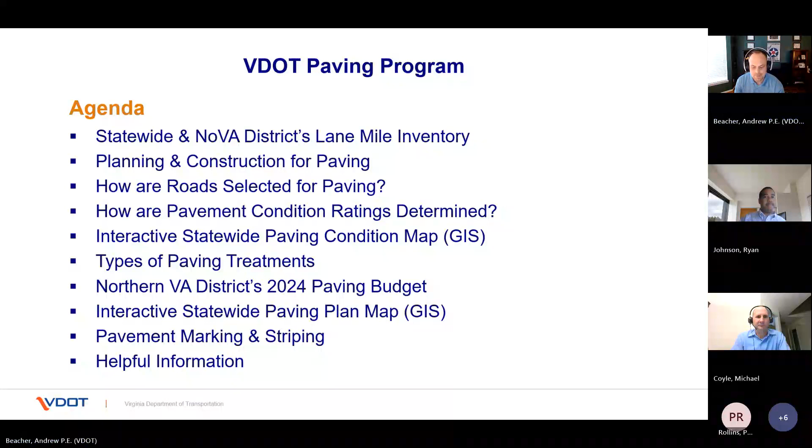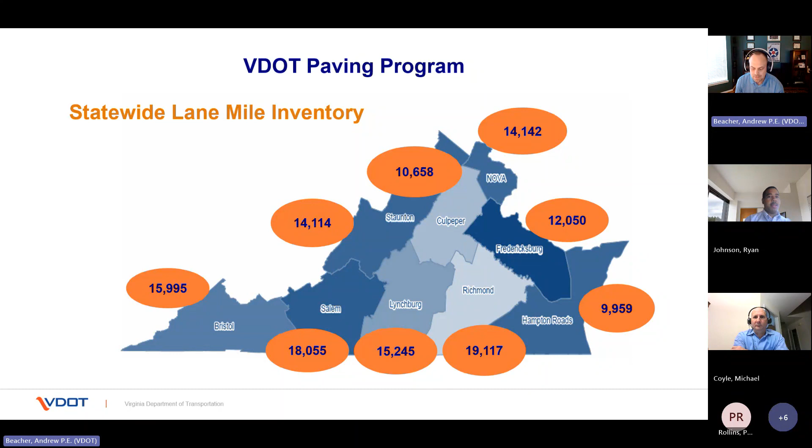All right, jumping right in. As you may know, when we talk about our roadway inventory, we talk about it primarily in terms of lane miles. Overall, you can see how Northern Virginia compares to districts around the state. We're somewhere in the middle in terms of lane miles, but packed into a much smaller geographic area. Breaking those numbers down further, of those 14,000 lane miles, over half are in Fairfax County, about a quarter in Loudoun, a little less than a quarter in Prince William, and Arlington County has only about 2%, keeping in mind Arlington maintains their own secondary roadways.

In terms of the paving program's planning and construction, the construction period occurs during the warmer months, April through about October or November. But the planning that goes into that happens year-round. Starting in the spring, data is gathered for the next calendar year. Later in summer and fall, that data is reviewed, schedules and contracts are prepared and advertised for bids, and prior year contracts are closed out. Finally, in the wintertime, bids are received and evaluated, contracts are executed, and notice to proceed is given to contractors for the next year. So it's a year-long process, and we're always busy with various aspects of the program.

A question we often get asked is how roads are selected for paving. Primarily, we look at the pavement conditions of the roadway. We have very specific measurements that we look at from the field, and I'll talk more about those in a minute. But we also consider other information such as the roadway traffic volumes.

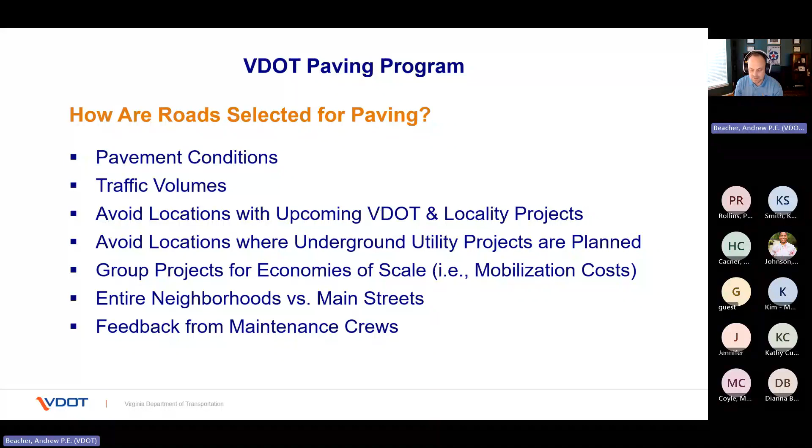So here's what I was talking about a moment ago as far as the data collection. There is a specific type of vehicle that we use for that. It's called an Automatic Road Analyzer, or ARAN.

There's a number of different types of data that we can collect with that: pavement distress, roughness, texture, and rutting. And we do that through various means, including digital scanning, measurements, video and imagery, and also GPS. So there is a lot that goes into that data collection program.

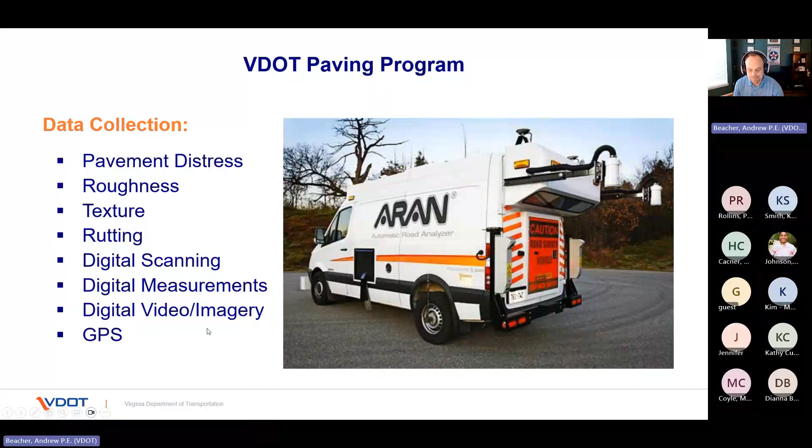Now, as far as the frequency, for the interstate, primary, and high volume secondary roads - those secondary roads with average annual daily traffic above 3,500 vehicles per day - we collect that data annually. For the lower volume secondary roads, it's about 20% annually, or 100% every 5 years.

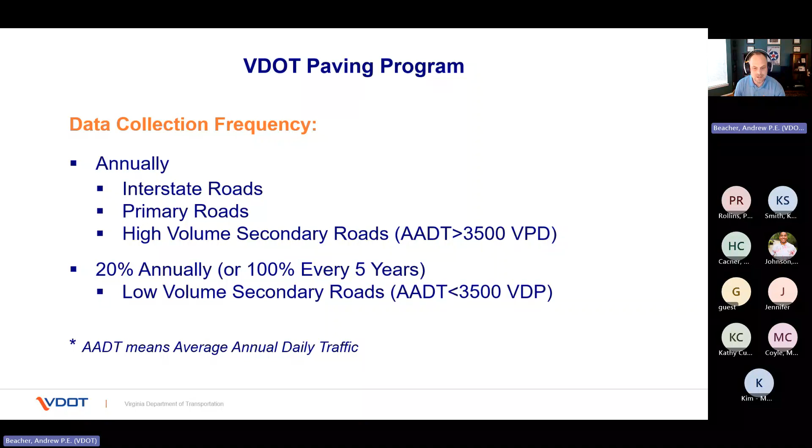Just one note on that: with the sheer number of secondary roads, that's why it takes us longer to make a complete circuit of all the secondary roads that we have in our system.

Now, the pavement ratings themselves are based on what is called the Critical Condition Index, or CCI, and you can see our scale on the left-hand side of the slide. Anything below 60 is considered poor or very poor. Above 60 is anywhere from fair to excellent. There's a couple images on the side to help give you an idea of what certain ratings feel like.

Obviously, our goal is to try and keep all of the roads in fair to excellent condition, and I'll talk a little bit more about how we grade ourselves in terms of how we're keeping up with the ratings on the next slide.

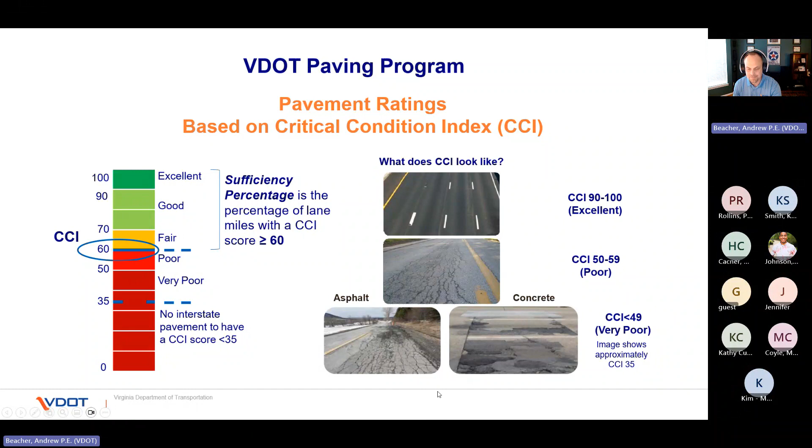So as an agency, VDOT has set targets for each of its districts with respect to pavement sufficiency, and it's dependent on the roadway classification. So we have different targets for the different types of roads.

For interstate roads, our target is 82%, meaning that 82% of all the interstate roads, we want to have a CCI of 60 or above. Then we look at the primary roads with high volume, over 3,500 vehicles per day, also a target of 82%. The lower volume primaries is a target of 75%. High volume secondaries is 82% again, and then the low volume secondaries is 60%.

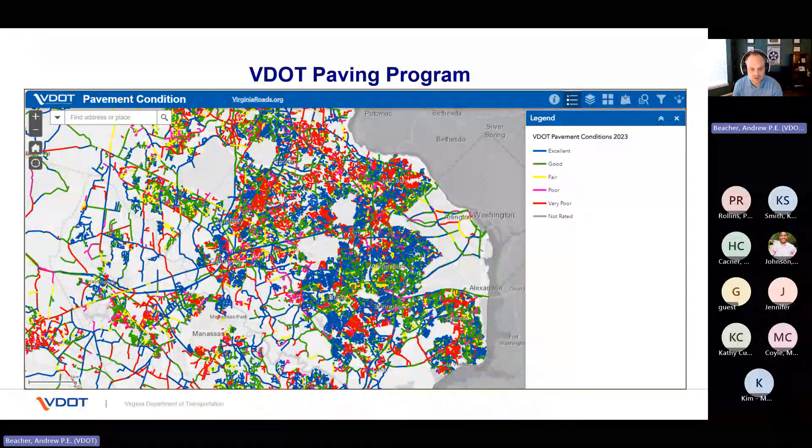But again, we're striving to meet those targets every year within our limited budgets.

In terms of the types of pavement treatments we implement, in some cases our staff may determine that a preventative treatment is in order. Rather than do a full milling and overlay process, they might just do something like what we call a slurry seal, which is preventative in nature. We're trying to extend the life of the pavement through this application until we can do a full mill and overlay in future years.

Next we have the actual milling and overlay I was referencing. There's two types: corrective or restorative maintenance. The difference is in one, you're only milling about 2 inches and then overlaying that back. With restorative maintenance, we're going down up to 4 inches and then overlaying back a surface and intermediate mix asphalt.

Finally, our less common treatment used in more extreme situations is full depth reclamation, where we actually excavate all the existing pavement, add back about 6 to 8 inches of pavement stabilization and 2 to 4 inches of intermediate and surface mix asphalt. That is less common, and usually we don't like our roads to get into that situation, but it does happen occasionally, and that is the treatment we would employ to correct it.

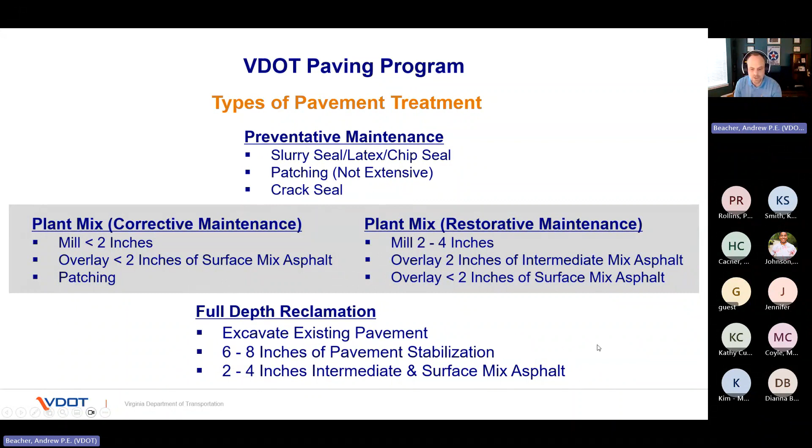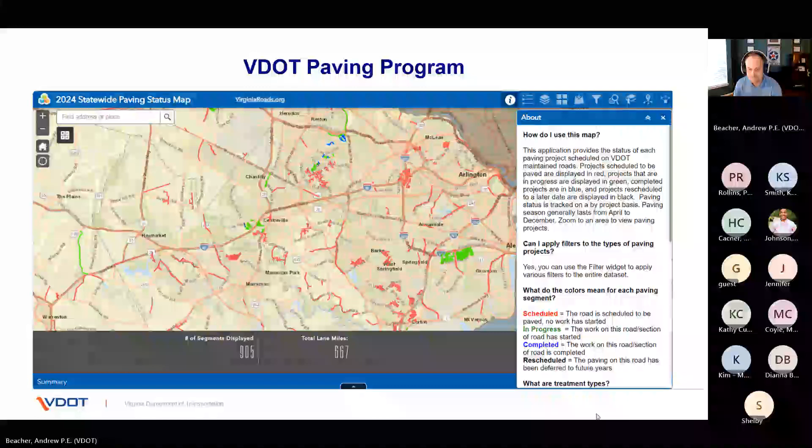As far as pavement marking and striping, the way our contracts are set up, we typically replace in kind the existing striping almost immediately after we get the repaving done. But occasionally we're able to make some minor adjustments during repaving. More elaborate changes, such as for bike lanes, new crosswalks, road diets, that kind of thing, require significant prior planning and coordination. It's something we work hand in hand with Fairfax County on if there's interest in making changes like that.

If there's a situation where we're looking to do some significant changes, in most cases we will defer that repaving to a future paving cycle so there's adequate time to do the appropriate planning and analyses, making sure everyone is comfortable and on board with the proposed changes. Of course, the county is going to speak a little bit later about specifics related to those types of initiatives that might be occurring in your community.

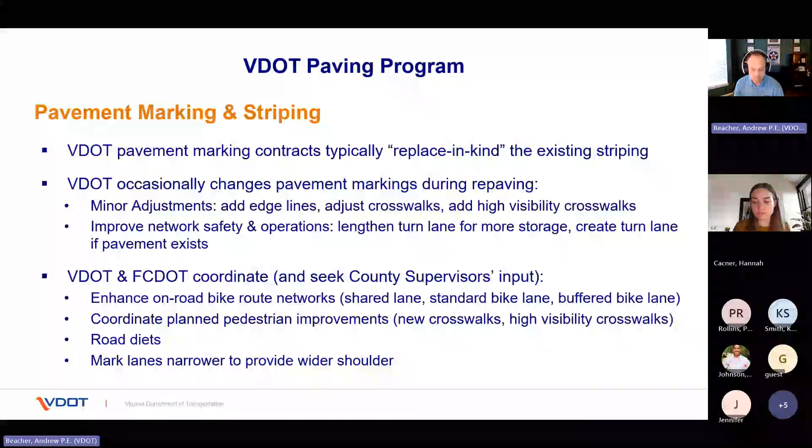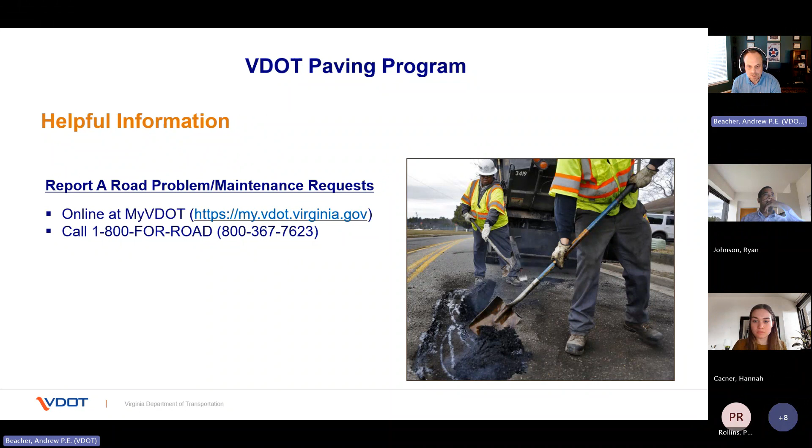Lastly, my concluding slide shows how the public can reach out to VDOT if you're experiencing an issue with a road or a maintenance request. You can always go to the My VDOT website at my.vdot.virginia.gov, or call us at 1-800-FOR-ROAD, that's 1-800-367-7623. We certainly encourage you to take advantage of those resources.

So at this point in the presentation, I'll move on to FCDOT's proposed striping modifications as part of the 2024 repaving program.

I'll start with a little background on Fairfax County's role in the repaving program. Every year we collaborate with VDOT to provide new striping improvements on our roadways, typically in the form of new crosswalks and bike lanes. We start off by reviewing VDOT's draft repaving list and identifying roadways that could be good candidates for new crosswalks or bike lanes. We're limited to roadway segments that VDOT is already repaving, so any proposed crosswalks or bike lanes need to fall within that area.

Also worth noting, the scope of this project on FCDOT's end does not extend beyond adding striping to the roadway, so improvements like protected bike lanes or sidewalks are not something we're able to add through this project.

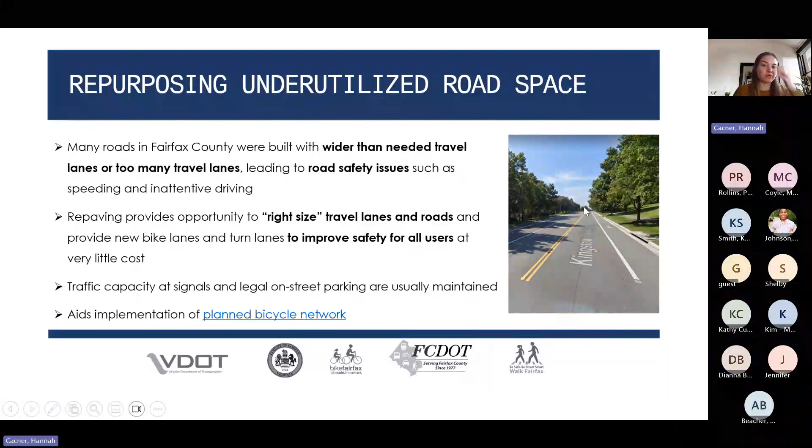A major reason we do this is to repurpose underutilized road space. Many of our roads in Fairfax County were built with much wider travel lanes than necessary, or with too many travel lanes, which can lead to safety issues like speeding or inattentive driving. The repaving program allows us to bring lane sizes down to a more appropriate size by adding improvements like bike lanes, which can make the road appear narrower and improve safety for all users at relatively little cost. Traffic capacity at signals is typically maintained, and we try to maintain legal on-street parking where space allows when adding bike lanes. Adding bike lanes through the repaving program also aids in implementation of our planned bicycle network.

As you can see from this photo, you get a really nice traffic calming effect through adding those bike lanes, as we did here on Annandale Road through the repaving program. With that additional striping, drivers get a visual impression that the width of the roadway has been reduced, which has been shown to slow vehicle speeds.

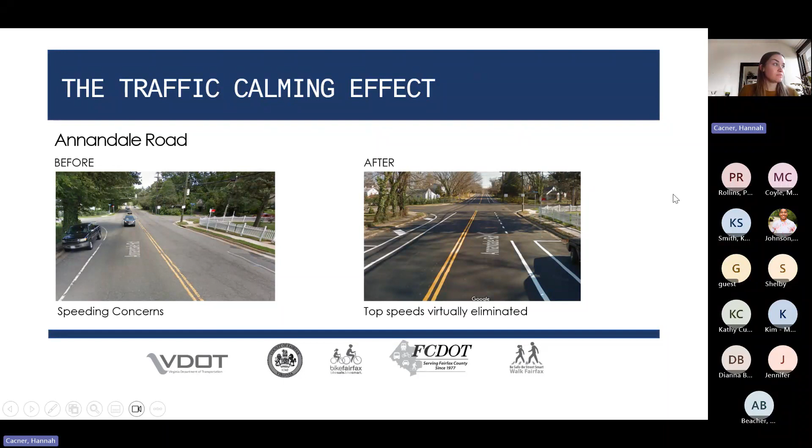These are the three types of on-street bicycle facilities you'll see in Fairfax County. We typically don't add sharrows anymore and are moving away from standard bike lanes, with the goal of adding as many buffered bike lanes as possible, to give cyclists additional separation between themselves and the vehicle lane, providing a more comfortable experience and hopefully encouraging more people to ride.

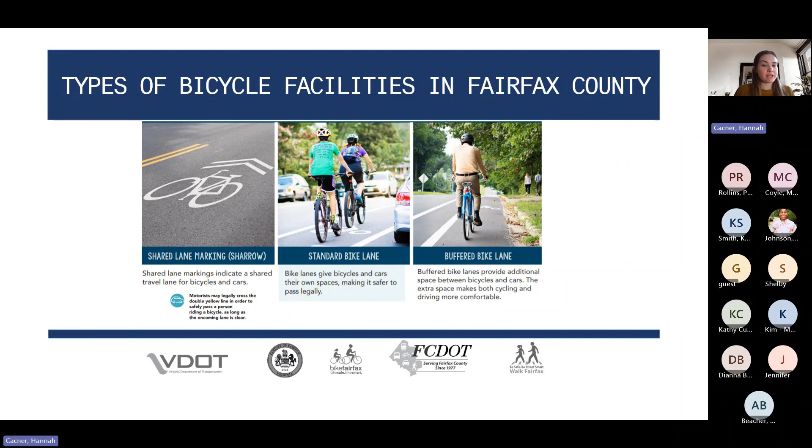Although this program only allows us to stripe bike lanes, adding the buffer gives us the option in the future to protect the bike lane by adding physical barriers through other projects.

This diagram outlines a few of the benefits that adding bicycle infrastructure provides. As you can see, bike lanes can benefit all roadway users, not just cyclists, and again can provide a nice traffic calming effect by making the roadway appear narrower to drivers.

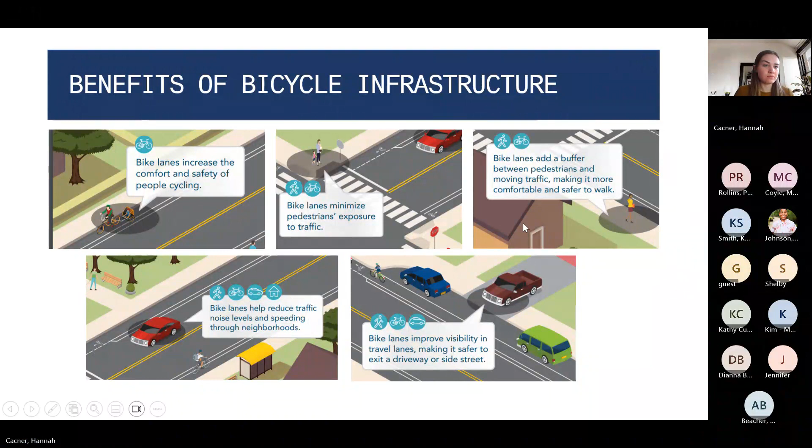Moving on to our planned striping modifications in Sully District. First up, we have a bike lane project on Walney Road between Westfields Boulevard and Westmore Street, which will involve adding buffers to and extending the existing bike lanes on Walney Road.

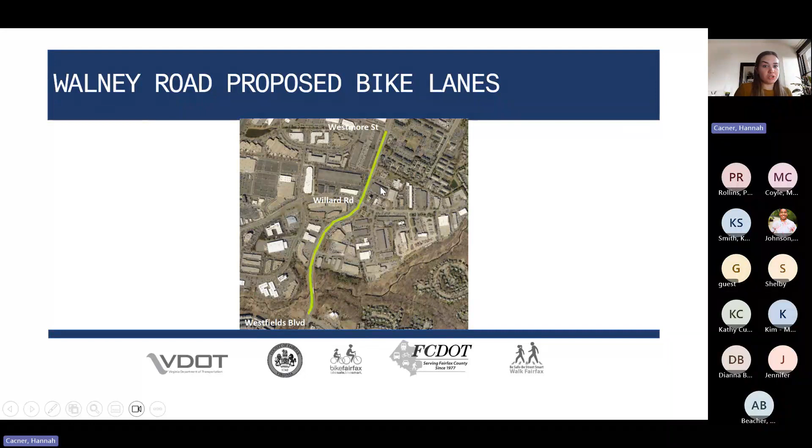Currently this segment of Walney Road that we are proposing adding bike lanes to has four wide travel lanes and a center turn lane. There are on-street bike lanes, but without a buffer, between Westfields Boulevard and Willard Road, and none between Willard Road and Westmore Street.

So what we're proposing is adding a buffer to the existing bike lanes between Westfields Boulevard and Willard Road, and extending that bike lane down to Westmore Street. This will have no impact on the travel or parking lanes, just using the existing width of the roadway there.

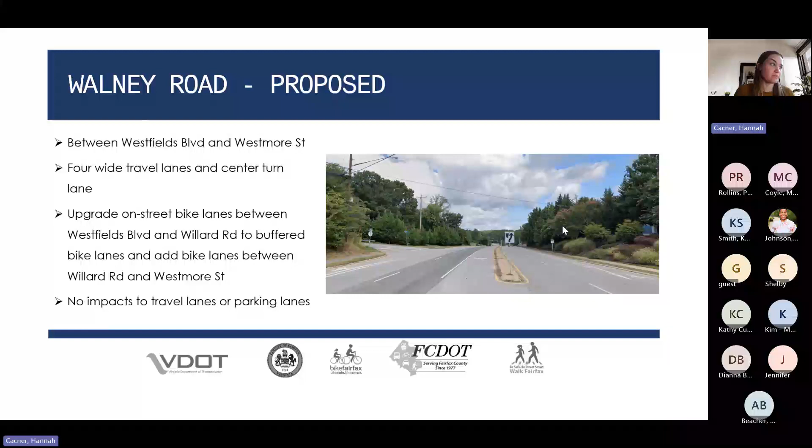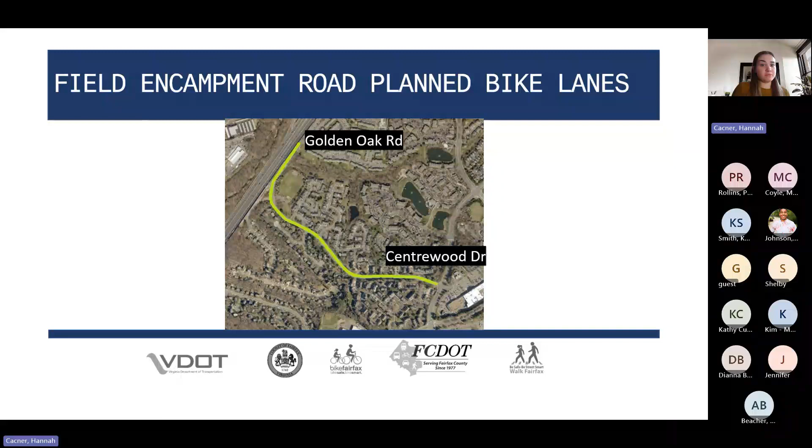We are also planning bike lanes along Field Encampment Road from Golden Oak Road to Centrewood Drive. VDOT was able to repave these streets more quickly than anticipated, so we had to decide relatively quickly whether to implement the projects prior to this meeting. We're not making substantial changes in terms of removing parking or travel lanes, so the purpose of this meeting is more informational rather than to obtain feedback on these bike lanes.

Currently this segment of Field Encampment Road has two wide travel lanes, on-street parking on both sides of the street, and no on-street bike facilities. There is a connection to the 66 parallel trail near Golden Oak Road, so adding the bike lanes will create a lower stress connection to and from the trail.

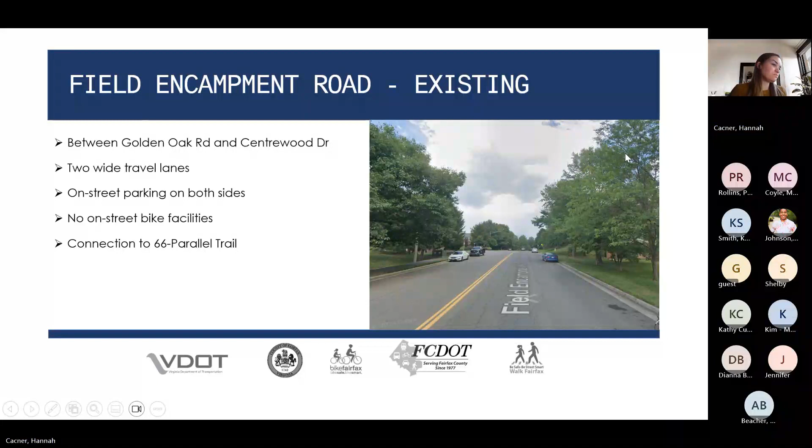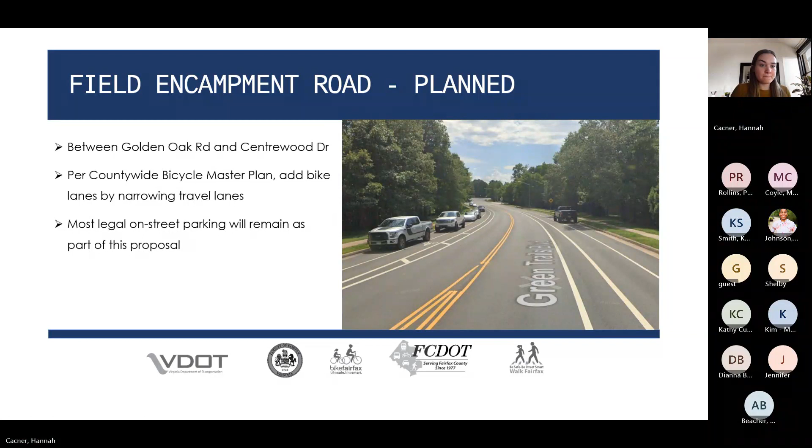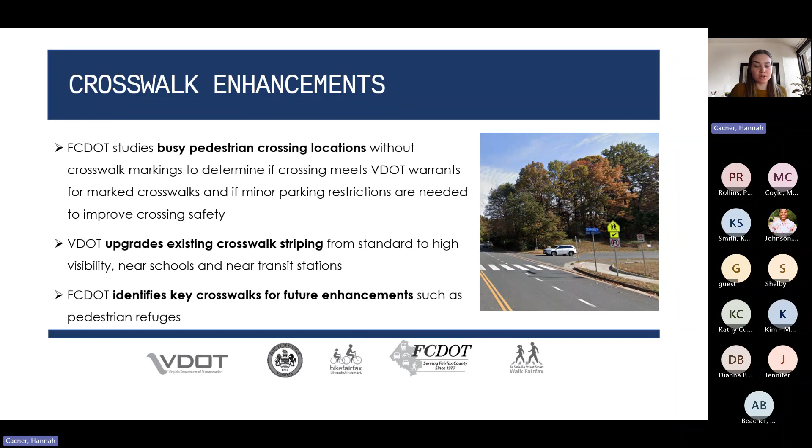Additionally, we'll sometimes look for opportunities to add striping for future pedestrian refuge islands. Although we can't add the actual pedestrian refuge island, we can add the striping for one to reduce cost on those projects in the future.

We also have one proposed crosswalk for the Dranesville district at Chesterbrook Road and Kirby Road. With that one, we will not have to restrict any parking, so it's very easy to add that one there.